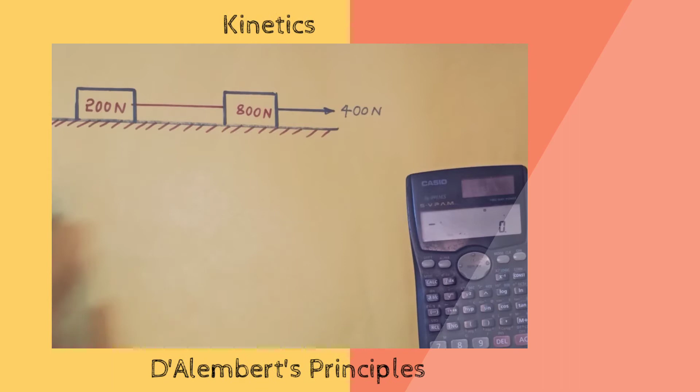So today class I am going to solve the problems on kinetics using D'Alembert's principle. So here is the question.

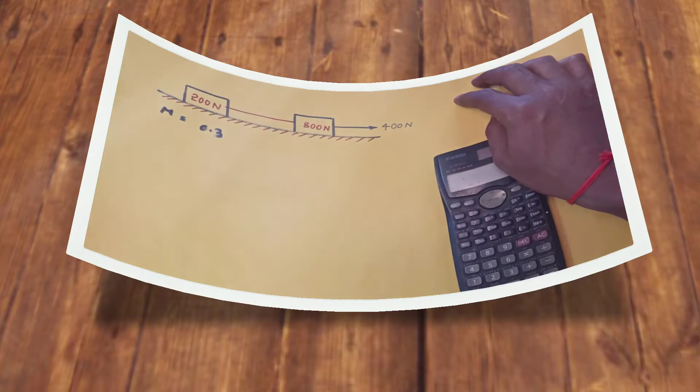In this question there are two weights, 200 and 800 Newton, connected by threads, which move along a rough horizontal surface under the action of 400 Newton. This 400 Newton force is applied to the 800 Newton weight, as you can see in the figure. The coefficient of friction between the surface and the weight is given as mu equals 0.3.

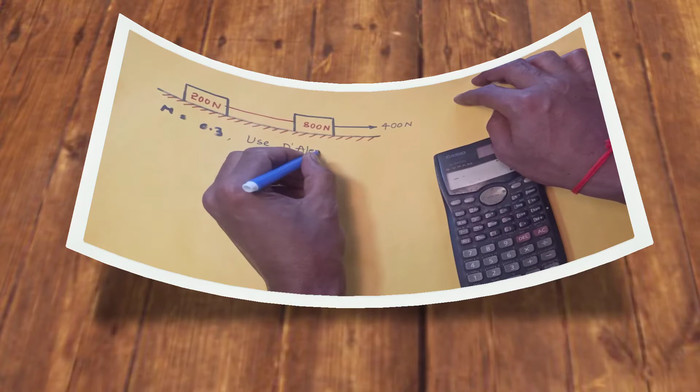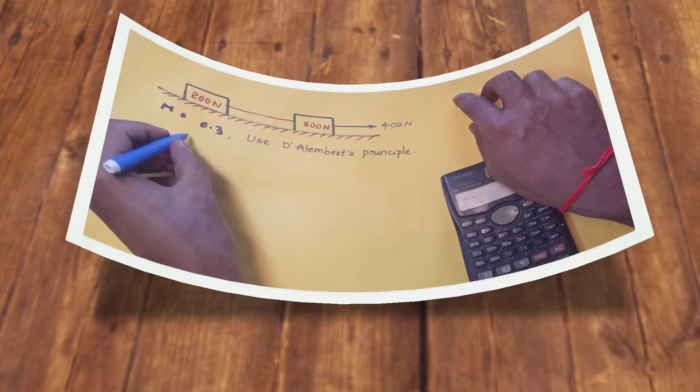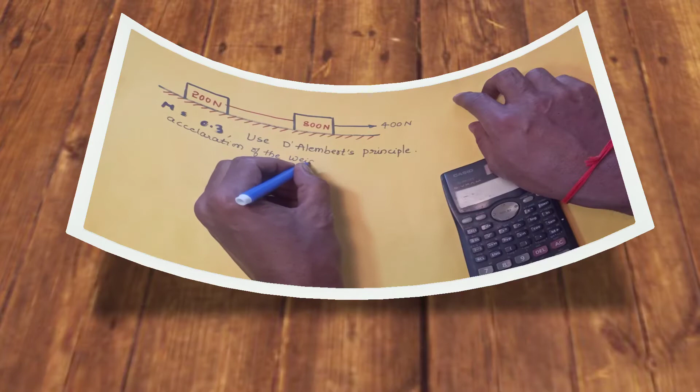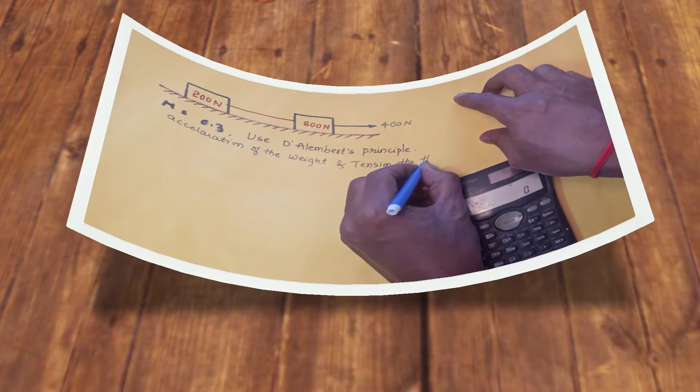Now let us use D'Alembert's principle to calculate the acceleration of the weight and also the tension in the string, or the tension in the rope or thread, you can say. So this is the question.

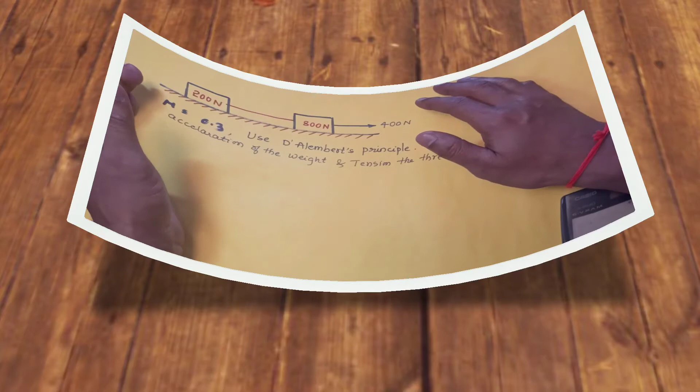So now using D'Alembert's principle and Newton's second law, you need to make the analysis of the forces and calculate the acceleration and the tension.

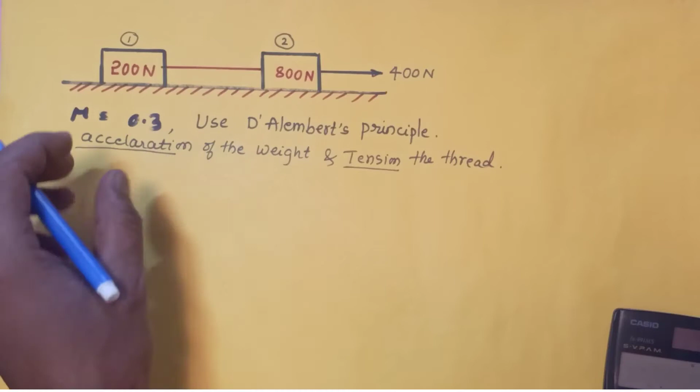Okay, so now let us make the free body diagram. Let us say this is block 1 and this is block 2. Initially there are two forces acting on the block, and with the inertia forces we have to make the free body diagram.

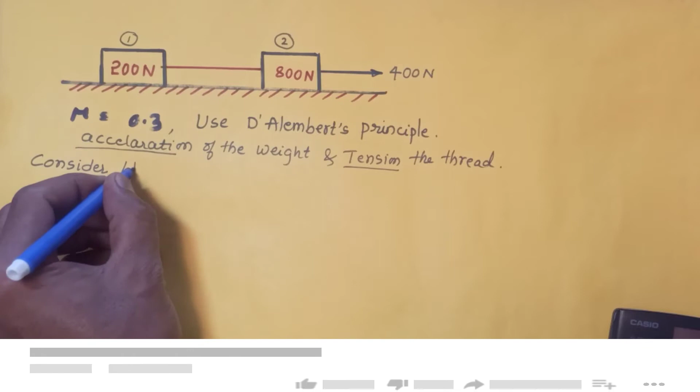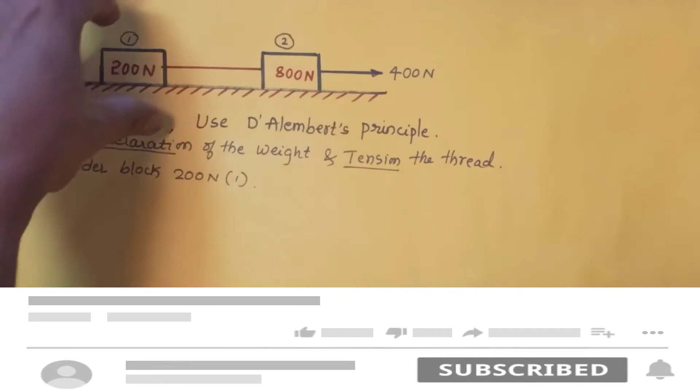Let us consider block 1, or you can say the 200 Newton block. You can make the free body diagram on the main element only, or make a separate diagram. I will draw it separately to help you understand. So this is the weight, given as 200 Newton, and this is the surface.

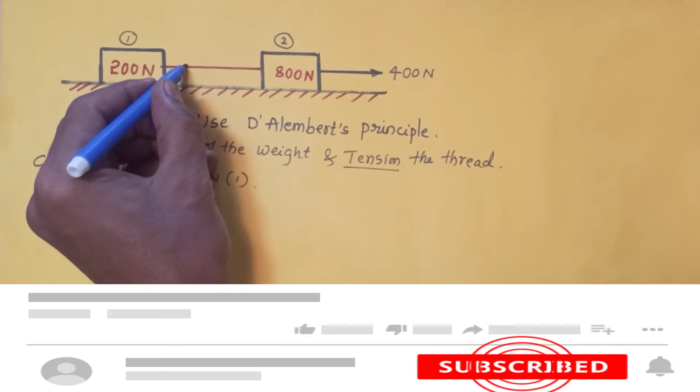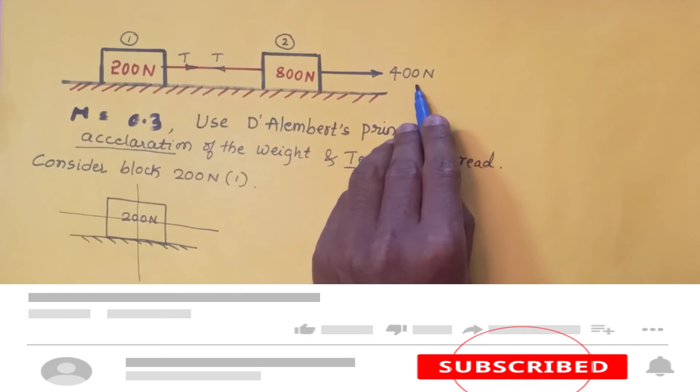Now first let us draw the horizontal forces and the vertical forces. In the horizontal forces, there will be tension in the thread. Let us say that tension is T for this block, acting towards the right side, because the 400 Newton load is acting towards the right, so T will be towards right. Now the reaction forces: here there will be a reaction force, and here there will be the weight.

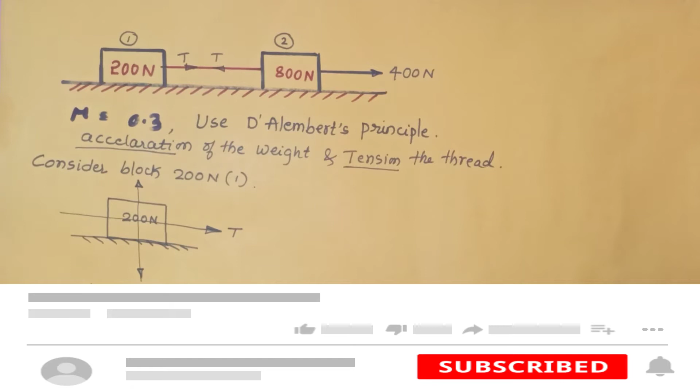Now the weight of this block is given as 200 Newton, so we say W is the weight in Newton. Sometimes it is given in kg, so you need to convert into Newton. And the reaction force for this block we will denote as N. Here on the left side there will be F equals M into A, mass into acceleration.

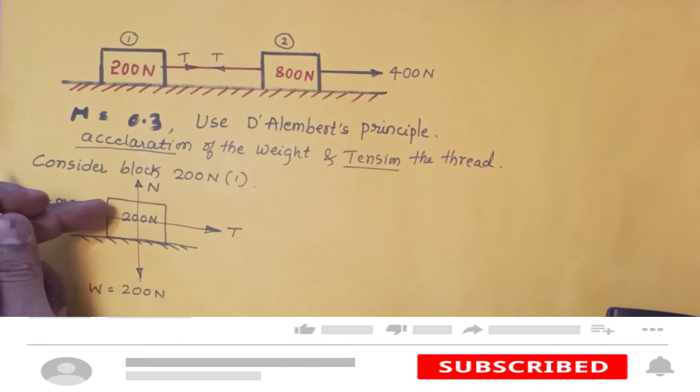Now there is friction between the body and the surface, so let us draw the friction force opposite to the tension, denoted small f. So friction is equal to mu into the reaction force N. This is what we call the free body diagram.

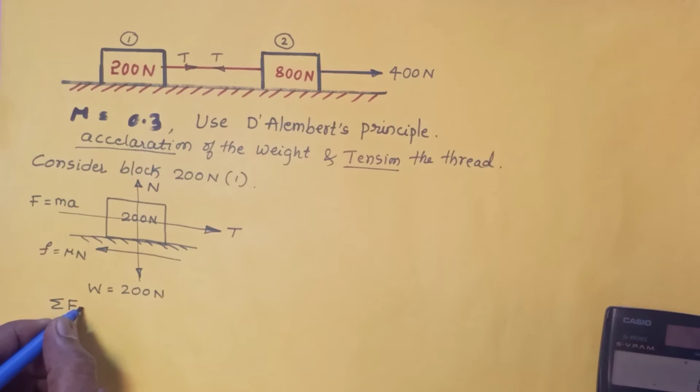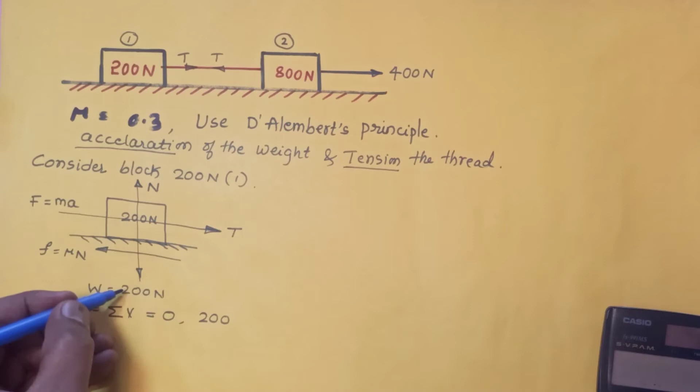So now let us analyze block 1. We say the sum of the vertical forces, sigma Fv, is equal to 0. In this diagram there are two vertical forces, N and 200. N is acting upward so it will be plus N, and 200 is acting downward so it will be minus 200, equal to 0.

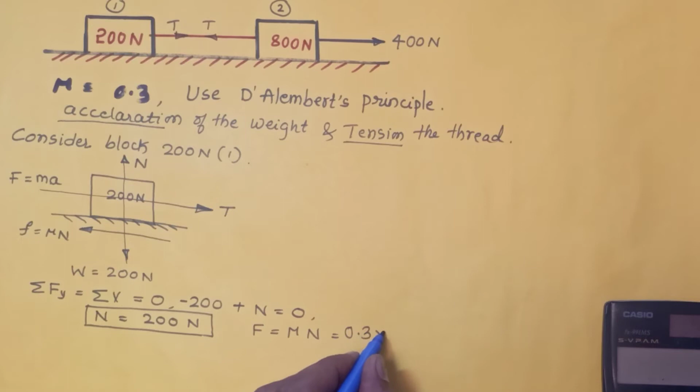So now we can say N is equal to 200 Newton, this is the reaction force. According to the law of friction we know F equals mu into N, where mu is given as 0.3, and N is 200 Newton. So we calculate the friction force: F equals 0.3 into 200, which gives 60 Newton. So this we will call F1, the friction force for block 1.

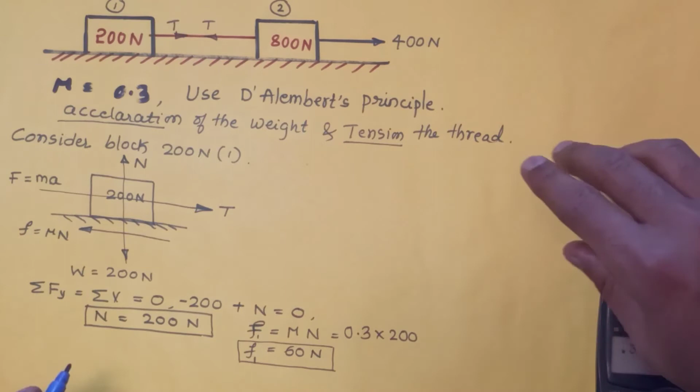So now again in the same body we will resolve by considering the sum of horizontal forces, sum of Fx, that is sigma H equals 0. Let us consider what are the horizontal forces. There are three horizontal forces: one is tension, another is force into mass (force equals mass into acceleration), and there is one more friction force.

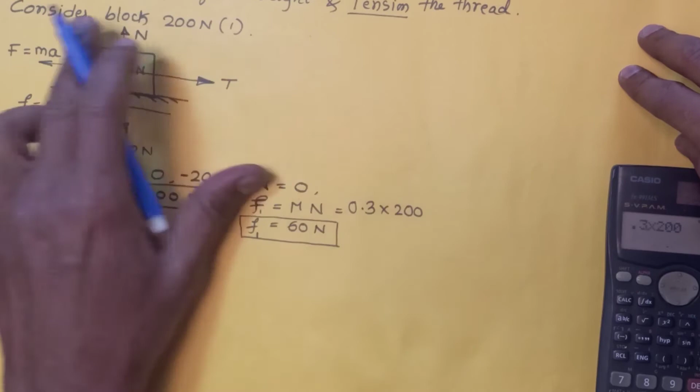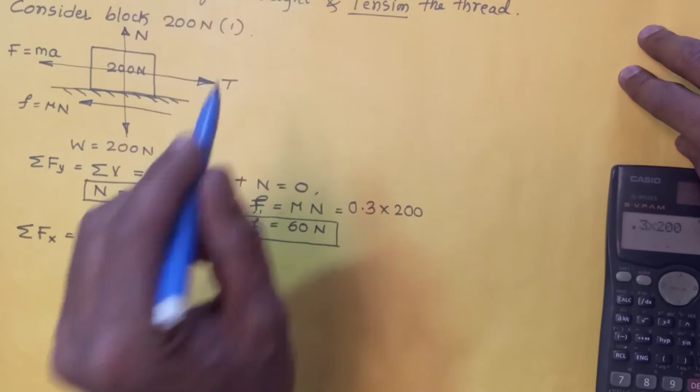Now in this free body diagram, first go to the main diagram to identify which force is dominating more. According to the given problem, where 400 is acting towards the right side, it means T is dominating on the 200 block. So T will be plus, and the friction force will be minus, minus F1.

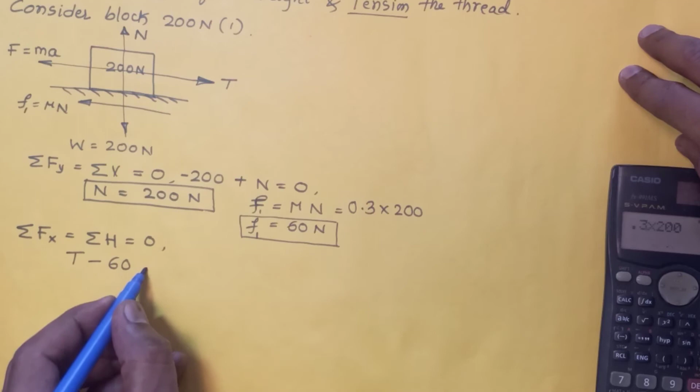So we will say this is F1, obtained as 60 minus 60, total F1 equals 60, that is equal to mass into acceleration. Since it is dominating here, we take plus, minus 60 for the friction force, equals mass into acceleration, this is m into a. We will further modify it: T minus 60, so this becomes in the LHS minus 200 divided by 9.81, giving 20.38 into a, equals 0.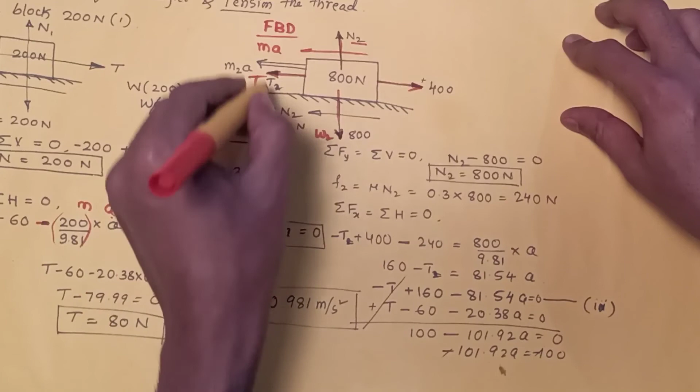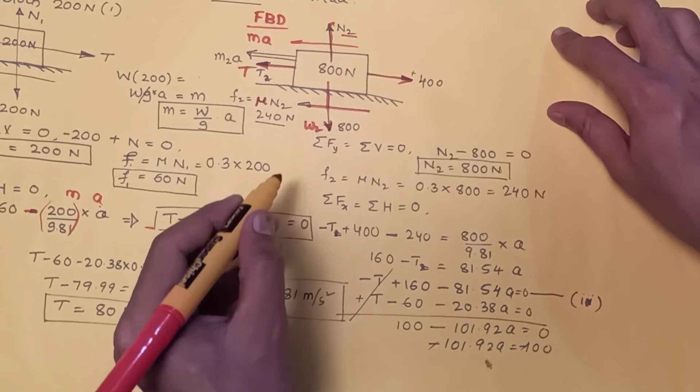So this is the free body diagram, and here the friction force is opposite to the tension, F2 equals mu into N2, that is the reaction force. Now we will make the analysis of sum of vertical forces equals 0. Vertical forces are two, one is N2 and another is 800. N2 acts upward, so N2 minus 800, giving N2 as plus 800.

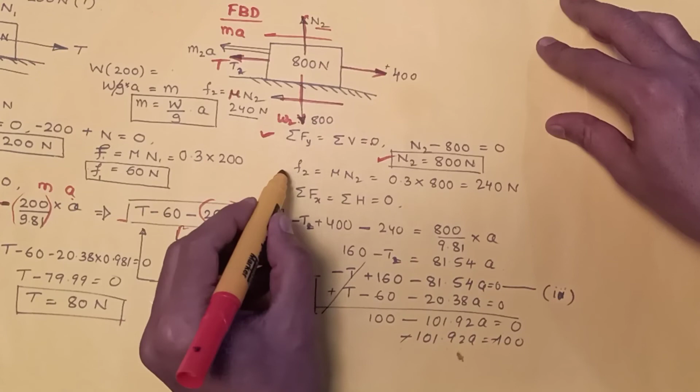Again, friction force F2 equals mu into N2, N2 value already calculated as 800, so with mu given in the question as 0.3, into 800, you get 240 Newton. Now we will resolve horizontally, all the forces resolve horizontally, that is sigma Fx equals 0.

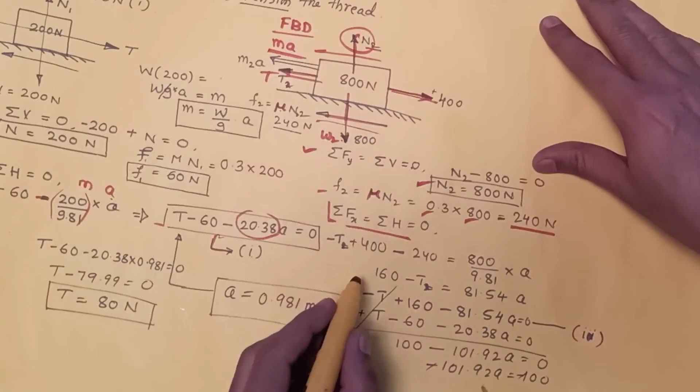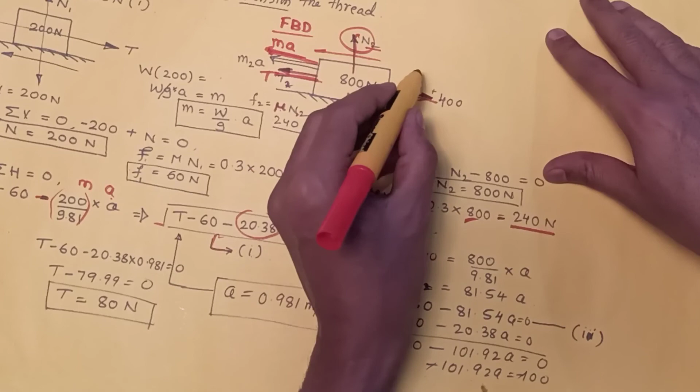Here there are four forces: one is 400, another is T, mass into acceleration, and the friction force. In this case 400 is dominating, so plus 400 is taken, and minus T, minus the friction force, and mass into acceleration is also minus. So plus 400 only is positive, the remaining forces are negative. That equation you have to write.

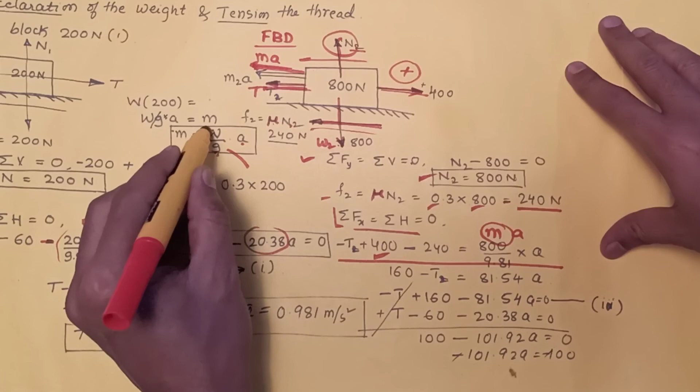This is mass into acceleration, where mass is written as W by G into A, where M equals W by G, that is weight by gravity into acceleration. So in that format you write it down, and later you get this equation: minus T plus 160 minus 81.54A equals 0. This is equation number 2, and this is equation number 1.

Now equate or add equation 1 and 2, and you will get the acceleration. That acceleration we obtained as 0.98 meter per second square, from equation 1 and 2.

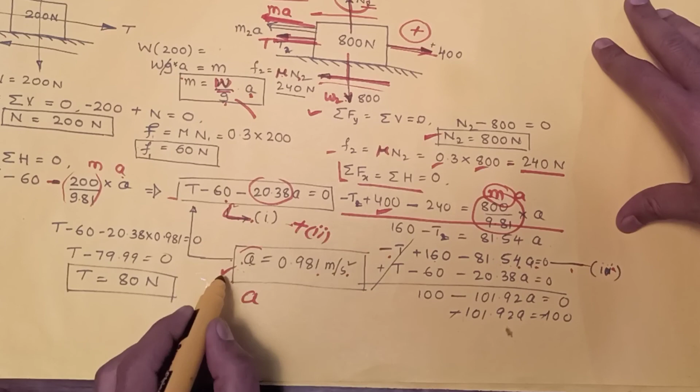Later the acceleration can be substituted either in equation 1 or 2 to get the tension in the spring or thread. So that tension, when you substitute A as 0.98 in equation 1, you get tension as 79.99, approximately equal to 80 Newton. So this is the solution for the given problem.